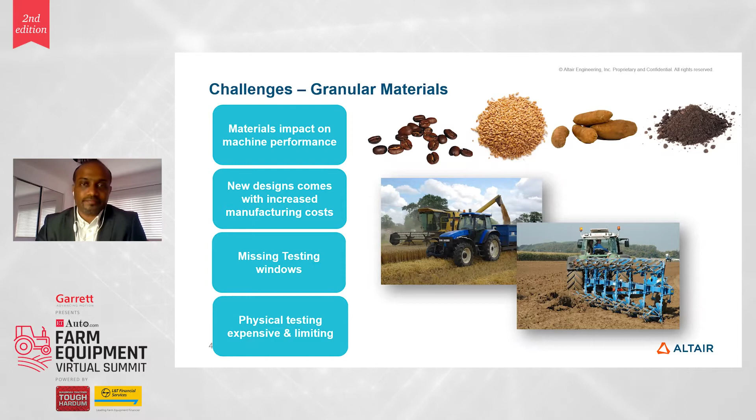This is where Altair EDEM comes into play. EDEM is a high-performance software for granular material simulation. It is powered by the state-of-the-art technology called the discrete element method, also known as DEM. EDEM simulates and analyzes the behavior of granular materials such as crops, seeds, soil, grains, and powders, and provides crucial insight into how these materials interact with the geometry or equipment in a range of operating conditions.

At Altair, we understand that CAE tools used in isolation only give you part of the picture. Driven by this, we have developed a range of multi-physics solutions inside the Altair suite, allowing designers and analysts to take a holistic approach rather than a siloed approach when designing such complex machinery.

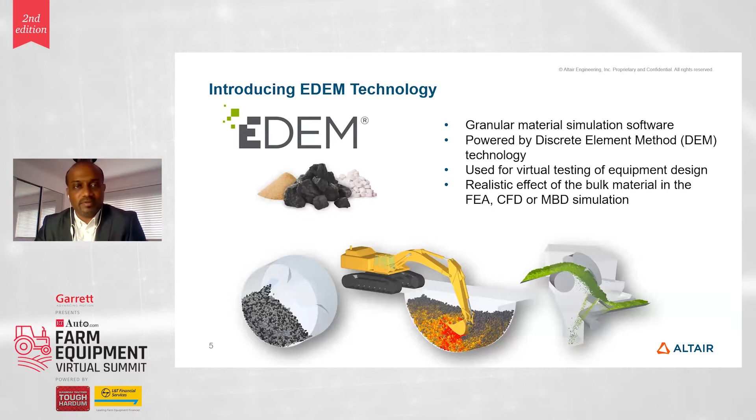Let's look at some of the benefits. EDEM can be used early in the design process to drive design decisions that can have a positive impact on the overall performance and reliability of agricultural machinery.

It helps avoid missing planting and testing cycles, saving time and money. It provides engineers with crucial insights into how materials like crops, seeds, and soil interact with the geometry or equipment during a range of operations and process conditions.

It enables engineers to investigate new designs without increasing manufacturing costs. Because you can run a large number of virtual simulations, you're able to test these designs virtually before producing physical prototypes for field tests.

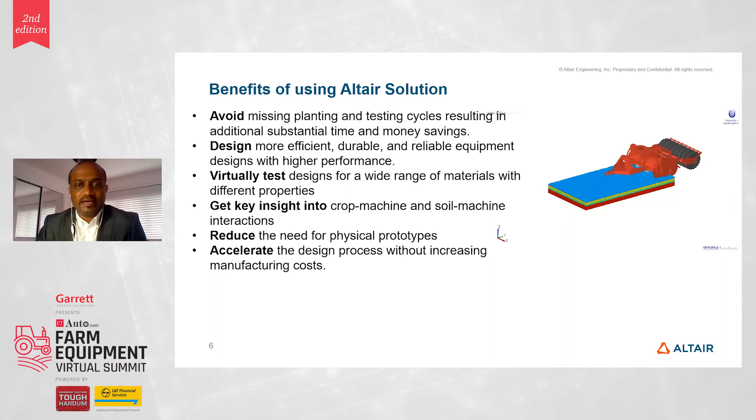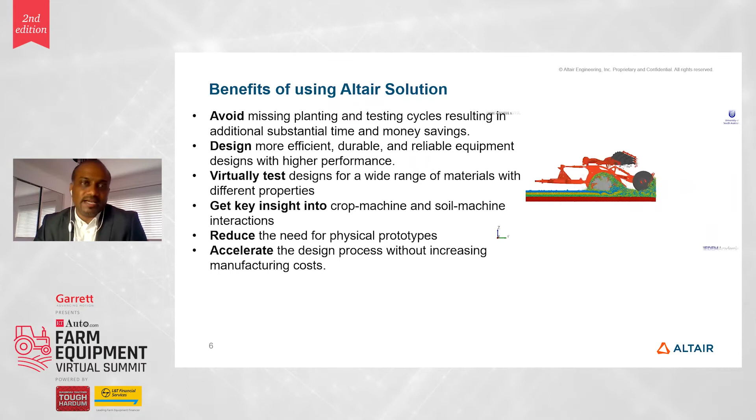Another big benefit of these simulations is repeatability. When working in a virtual environment, the material models you use are predefined, giving you a very repeatable test environment to compare results between design iterations—something which cannot be guaranteed with physical testing.

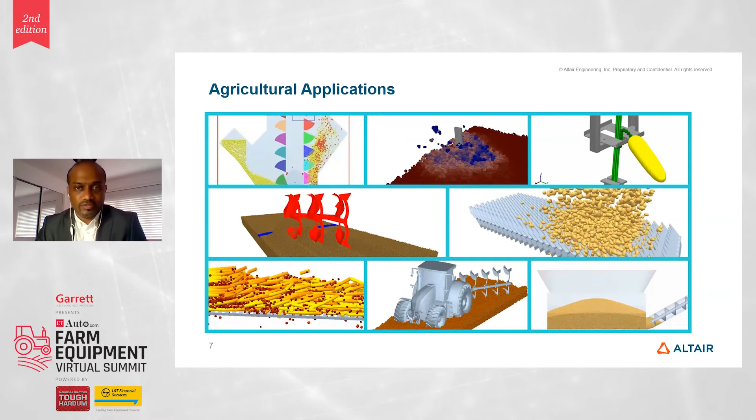The industry is highly competitive, and manufacturers are driven to bring innovations to market before each harvest season. The use of Altair EDEM technology has allowed companies in this sector to come up with innovations and reduce reliance on prototyping. These are some of the applications listed here, and we will cover a few of those today and how farm machinery companies are utilizing them.

First, let's look at grain and crop handling systems, specifically focusing on combine harvesters. The Indian combine harvester market is projected to grow at about 5% during the next few years. Combine harvesters in India are majorly used for harvesting grains and cereals compared to other crop types. According to recent research, the market is dominated by self-propelled combine harvesters, and more than 50% of harvesting of wheat and rice in India is already mechanized. This is where the industry is focusing on driving innovation and efficiency.

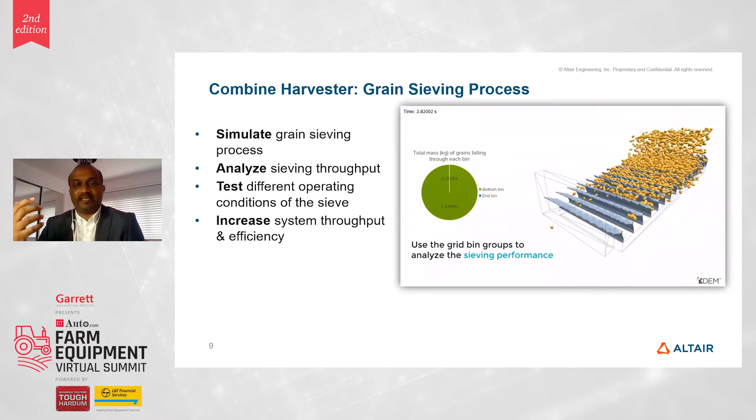Let's consider the typical process within a combine harvester where advanced technology like Altair EDEM can be utilized. One process inside the combine harvester is sieving, which separates the grain from unwanted plant material. EDEM technology can be used to assess sieving throughput and compare different sieve designs across a range of operating conditions. For example, you can look at different sieve designs and modify the frequency at which the sieve is vibrated to find the best design and operating conditions for maximum throughput.

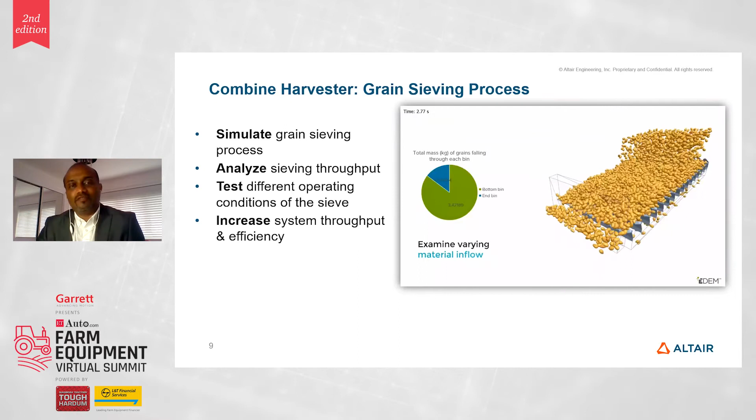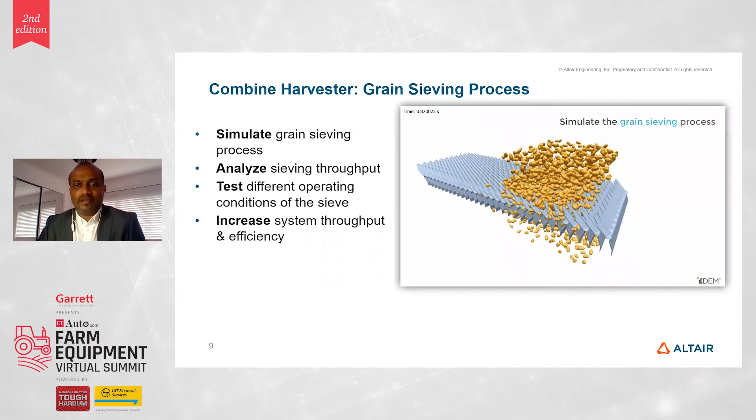This kind of virtual prototyping allows you not only to innovate, but also to avoid missing testing cycles due to adverse weather conditions like monsoons, resulting in substantial time and money savings.

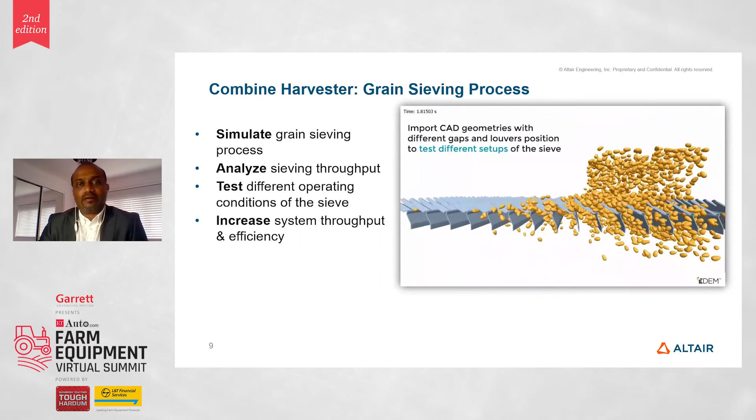Another application within a combine harvester is the straw chopping process. The cutting of threshed straw and its uniform distribution is very important. Any stalk cutting operation requires energy, and the shorter the straw is chopped, the more cuts are needed and more power is required. EDEM can be used to compare different designs and predict how they influence stalk orientation and improve chopping quality, which also improves power consumption. All of this has a direct impact on the ultimate performance of the machinery.

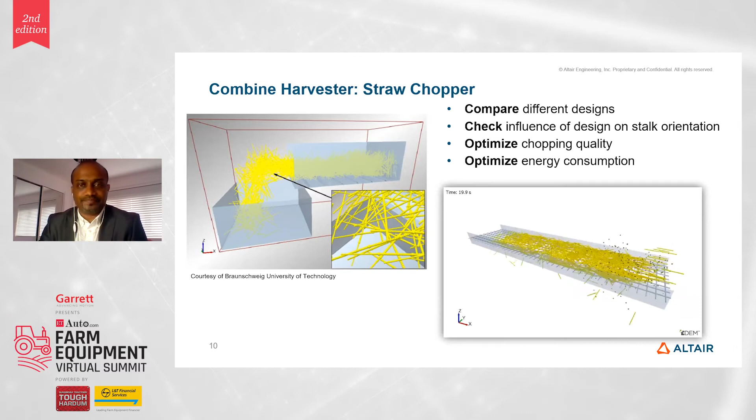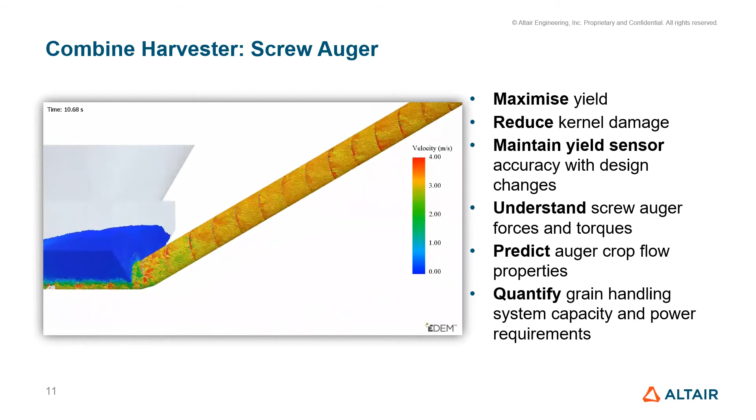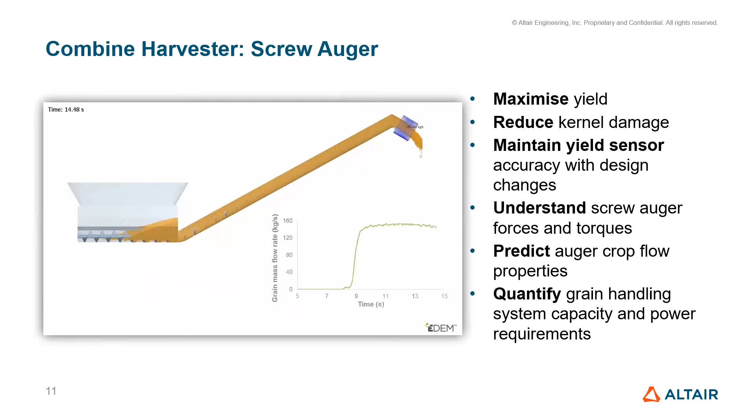Another process that can be studied with EDEM is screw augers. In combine harvesters, they are used to transport grains into a bin. In this particular case, the hopper is filled with material representing grain. Then the screw augers, one horizontal and one angled into the vertical direction, begin rotating, and you can see the grain begin to be transported. The grains are then displayed by velocity and mass flow rate - just some of the types of visualizations you can do using these simulation technologies.

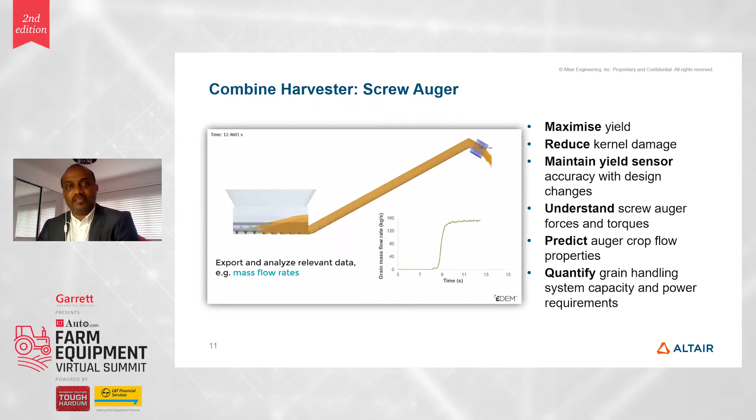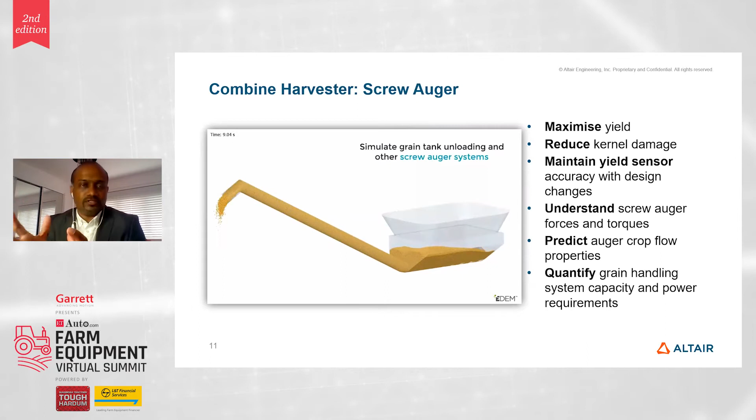We've had users who optimized the screw auger by changing the size and speed of rotation, resulting in 99% of the material going into the bin as required, whereas previously, with the old designs before simulation, almost 40% of the material went onto the field rather than onto the bin. It also helped them reduce loads by 50%, reduce wear, reduce damage to the geometry or equipment, reduce energy consumption, and reduce damage to the crop.

As I mentioned earlier, EDEM can be combined with other CAE tools such as FEA analysis, and we have some great Altair FEA tools within the portfolio. Within a combine harvester, a hopper full of grain-type material empties over time, and the contact forces from EDEM are mapped onto the FEA mesh. You can certainly notice the fidelity of the force input that the technology can provide. Alternative methods would require you to completely overlook the real loading scenario. These are the advantages that simulation technologies bring to designing some of this complex farm machinery.

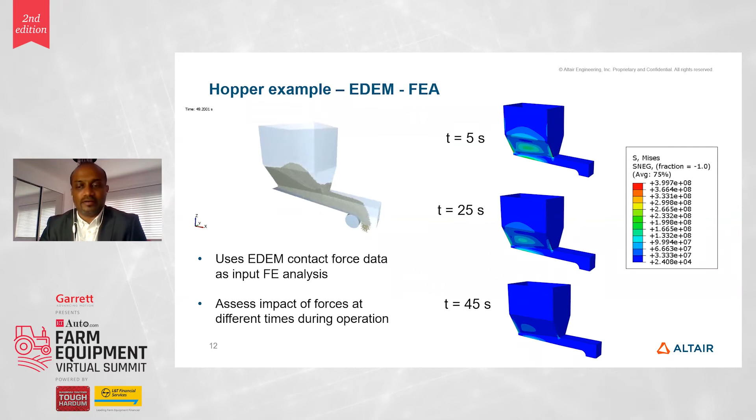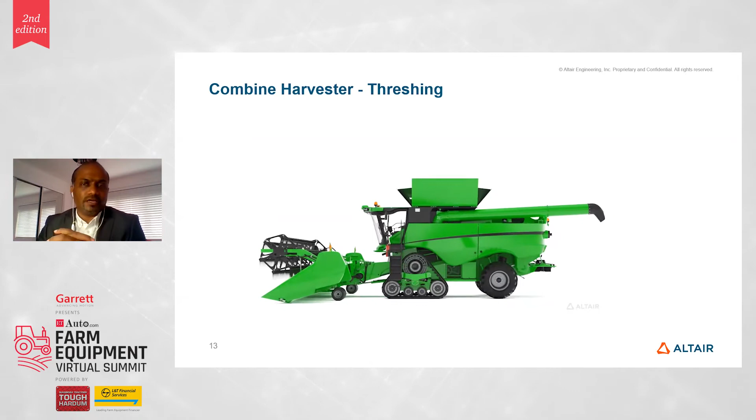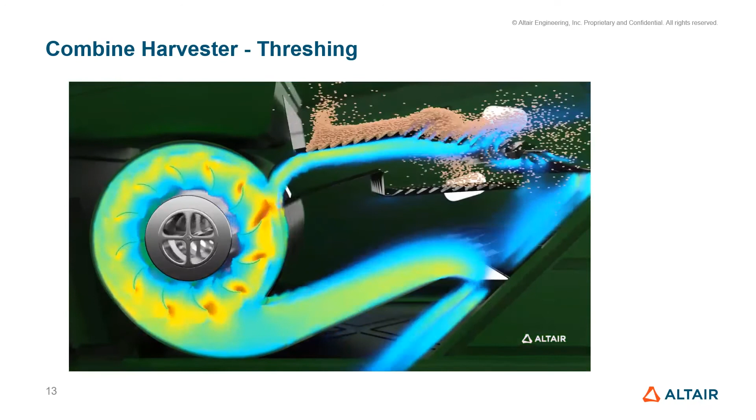So let us look at one of the most important processes: threshing. It is one of the most critical parts within the combine harvester, and often poorly understood due to its complexities. Altair has a great solution for modeling granular materials using Altair EDEM, as well as modeling the airflow using Altair CFD in a coupled environment, to solve this kind of complex problem.

So advanced analysis can be performed to make complex engineering decisions. Looking at the analysis, it can be predicted that by controlling the movement pattern and velocity of airflow, we can greatly influence the separation efficiency. These are the kind of in-depth analyses that we can get into earlier. Otherwise, it would have been a black box when designing some of these complex pieces of equipment.

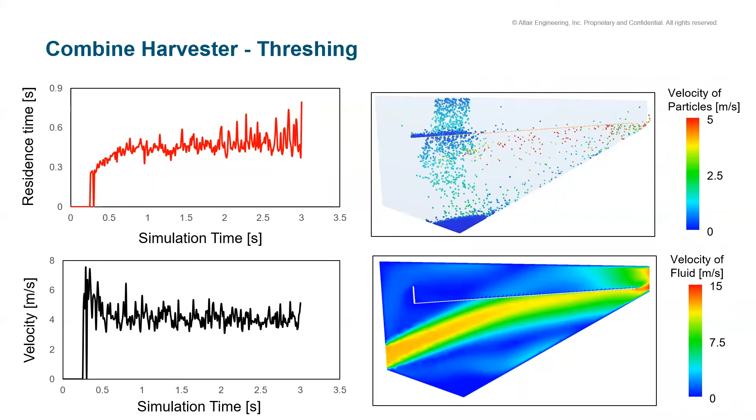Okay, so let's move on to the next example.

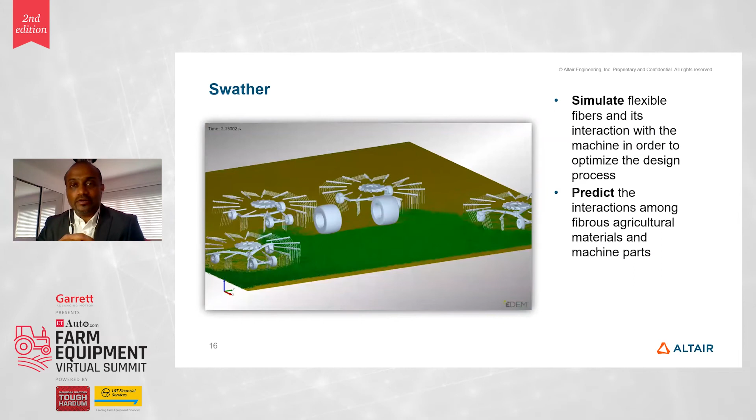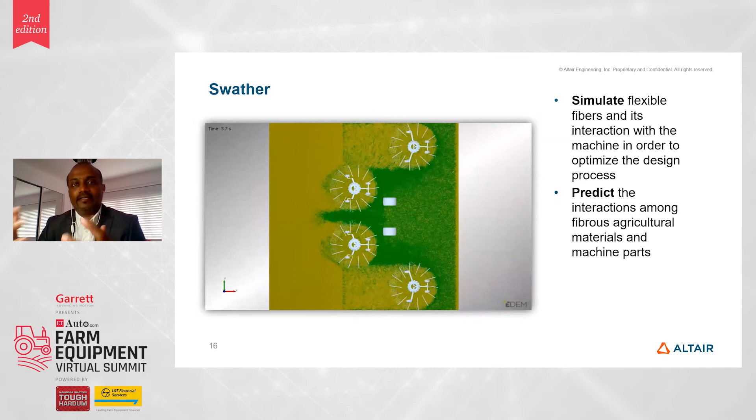This video shows an agricultural machine that moves grass into windrows. Complex materials like grass and other fibrous materials, and their interaction with the equipment, can be simulated using EDEM and other simulation technologies. What are you looking at?

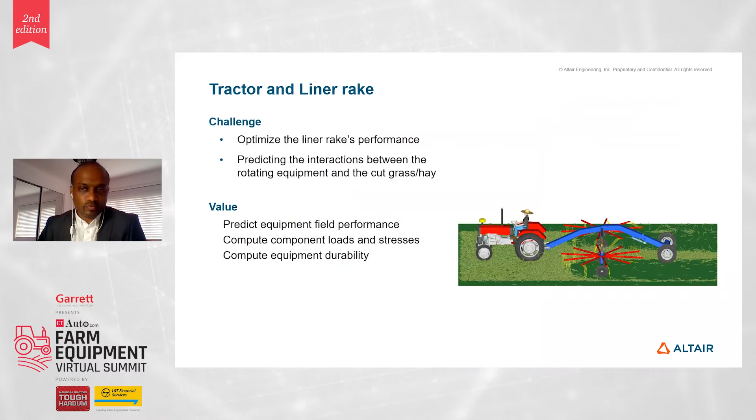As mentioned earlier, it is important to take a holistic approach when modeling such processes. So in this example, we are looking at ways to optimize the liner rake performance by simulating the full tractor and the motion of the equipment, and to understand the machine's dynamic response under different scenarios, for instance, the force required to move the system for different types of crops.

As you can see in this example, Altair offers a full portfolio, whereby EDEM provides realistic loads data and identifies areas where the equipment is likely to wear.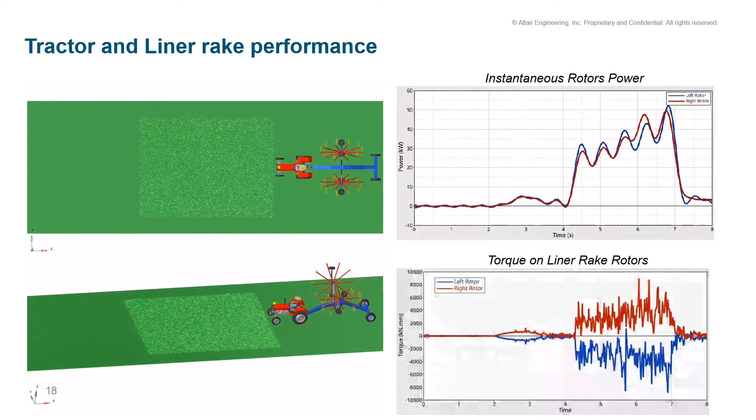By coupling EDEM technology with Altair Multibody Dynamics MotionSolve technology, it is possible to understand the global dynamics of the system. Here you can see a system model that can represent the real-world scenario by estimating the power consumption by the rotors.

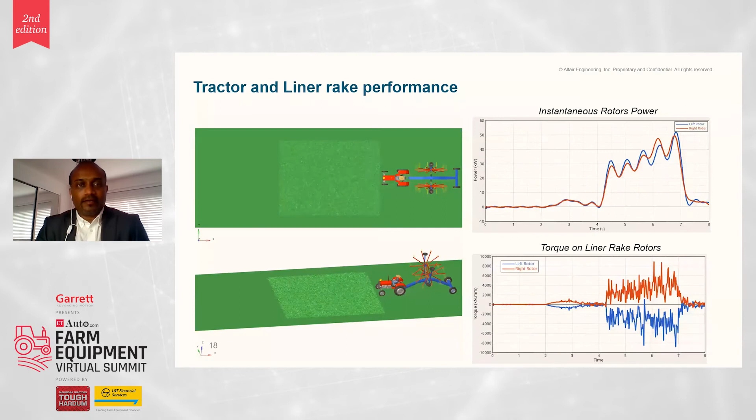Okay, so let's move on to the next section.

Here we are going to look at some examples of machine-soil interaction. In India, mechanization is concentrated on tillage and seedbed preparation and harvesting. In tillage, old types of equipment such as cultivators and disc plows are still used. According to a recent study, the use of proper equipment can increase crop productivity by up to 30% and reduce the cost by about 20%.

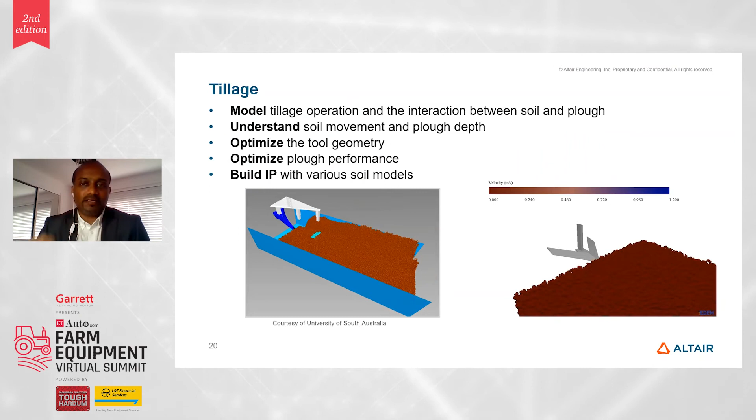These are substantial numbers we are talking about, and the question is how to achieve them. Improved efficiency and better productivity of tillage tools are extremely important to meet the growing demands of the industry. In the case of tillage equipment, the blades might be interacting with a range of soils across the country, with different levels of compressibility and stickiness, or perhaps even harder materials like rocks, all of which will impact the durability as well as the performance of the machine.

So being able to predict how the equipment will be affected by a specific material, and identifying potential wear on the tools, represents a key aspect to ensure the machines will perform as expected.

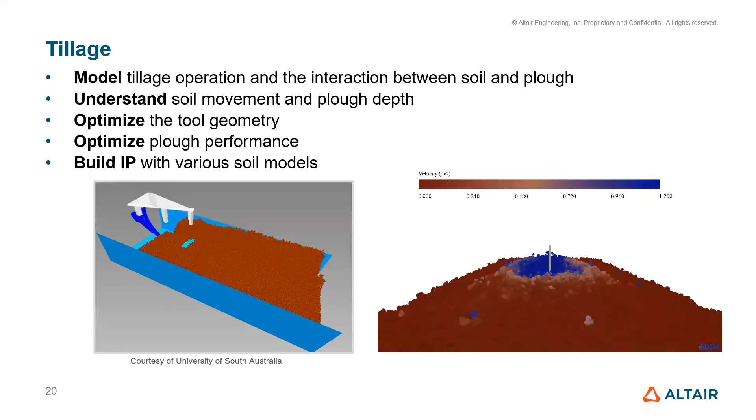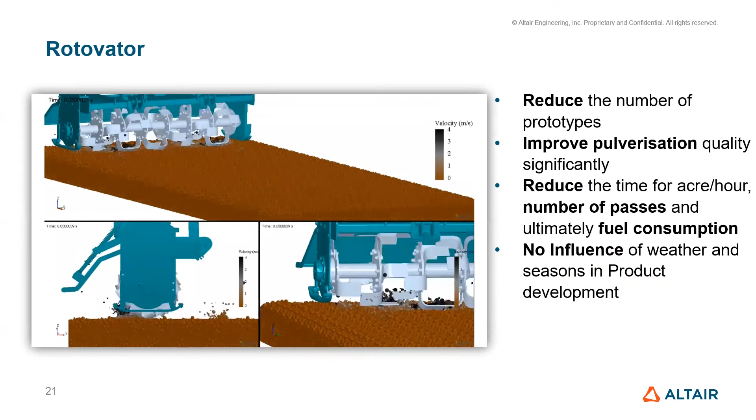In the next example, I'll show you the single shaft rotovator. A rotovator is an agricultural implement used to prepare the soil by turning it at depth. Several in-depth analyses are shown here: pulverization quality, voidage measurement before and after operation, draft force, vertical force, torque acting on the rotovator, through to the power required to operate at a desired depth of cut.

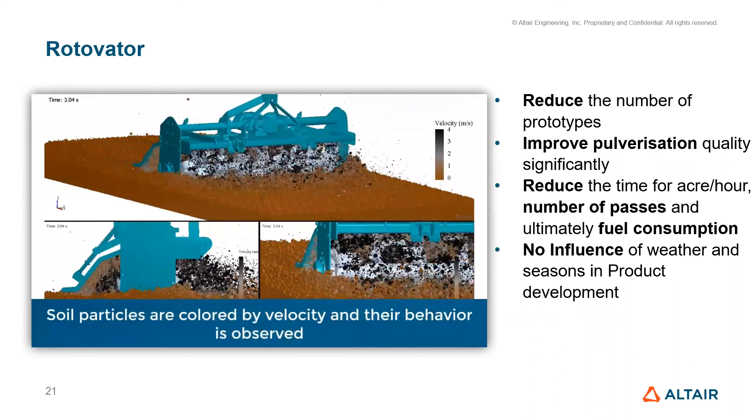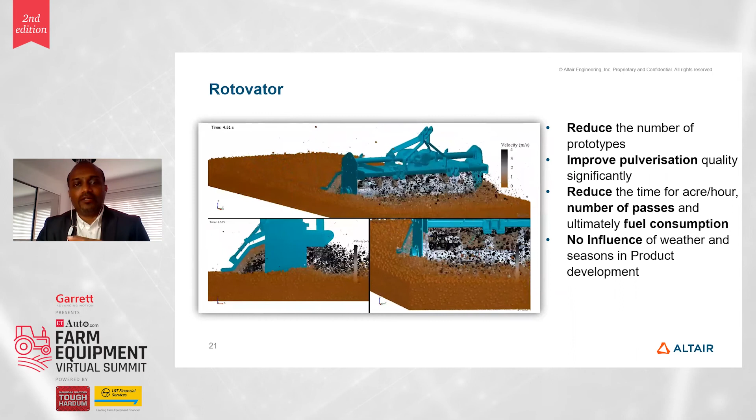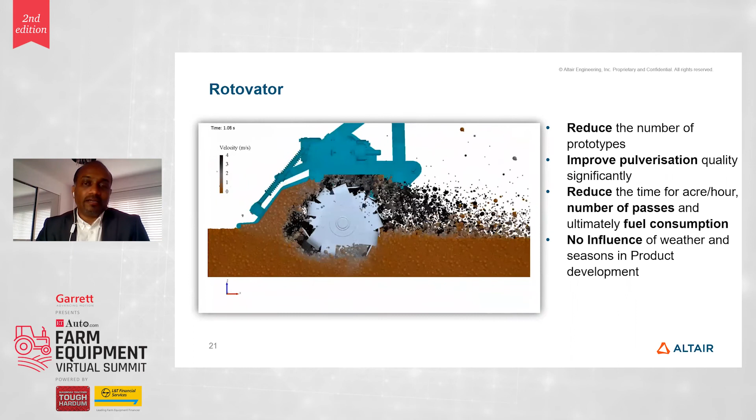Using these state-of-the-art simulation technologies, manufacturers can reduce the number of prototypes as well as come up with a solution during the right season. Trying out different blade profiles and different operations takes too much time if they go to field testing for every single configuration.

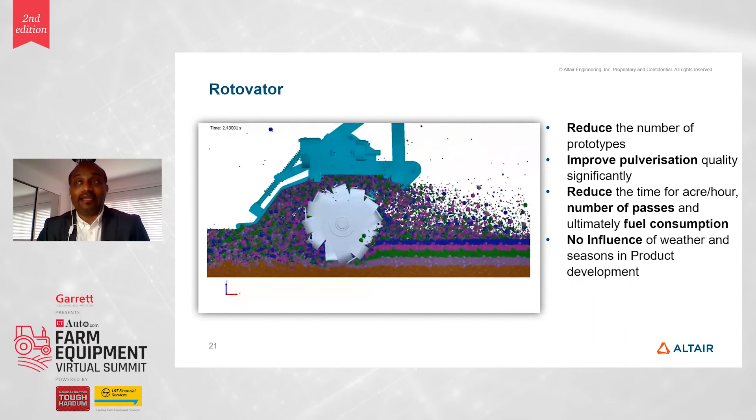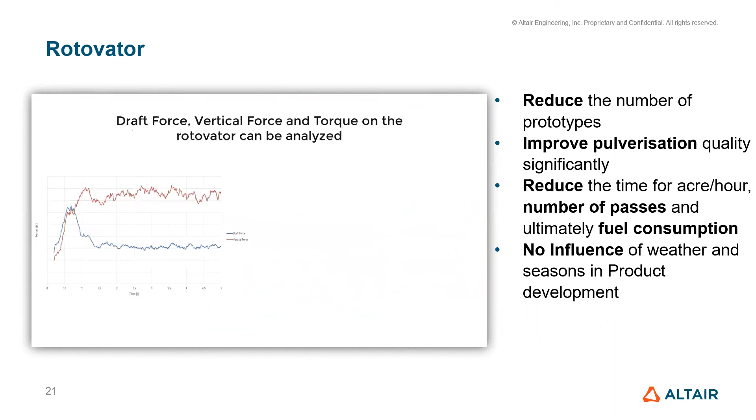So reducing two passes of soil tillage to one pass, and identifying the different depth of cut and soil pulverization for different types of blade geometry, all have a direct impact on the time taken per acre per hour, and ultimately on fuel consumption.

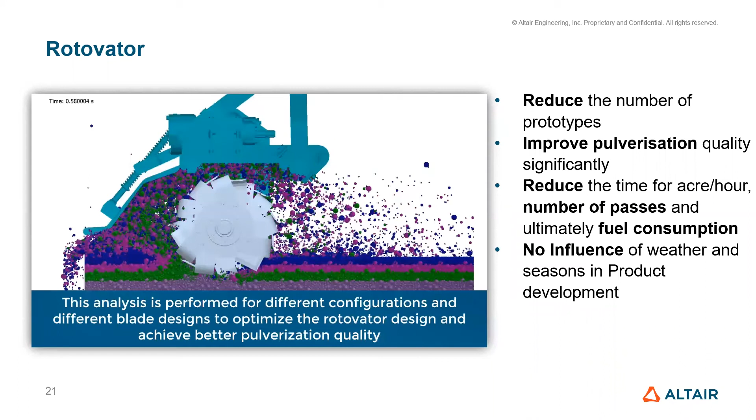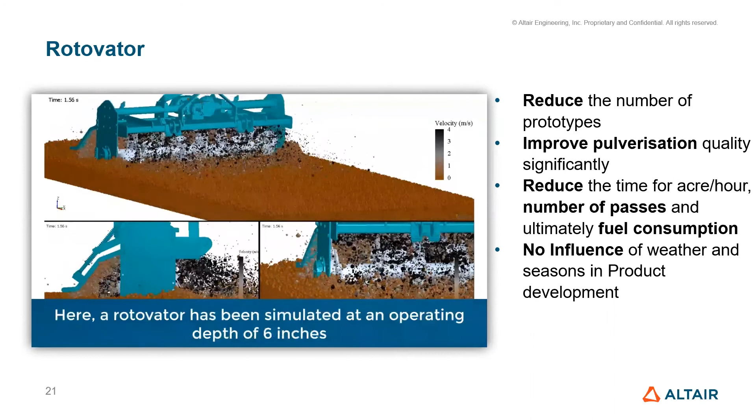Using simulation, there is no influence on weather and seasons in product development. You can do A/B product comparison with the same boundary condition, but with less cost and faster build of prototype. Better visual understanding of the black box inside the machines are some of the key business benefits for farm machinery manufacturers.

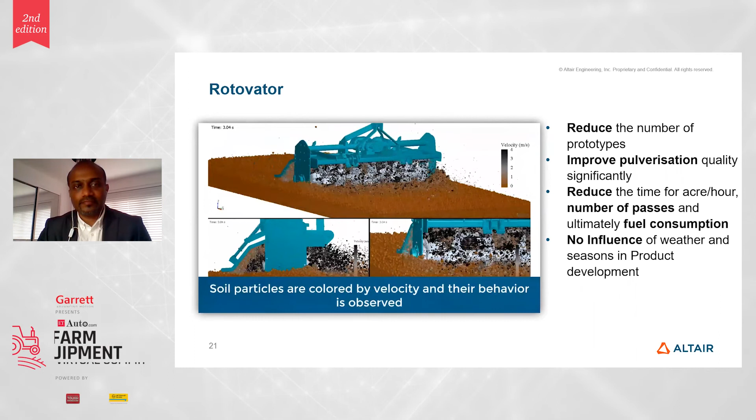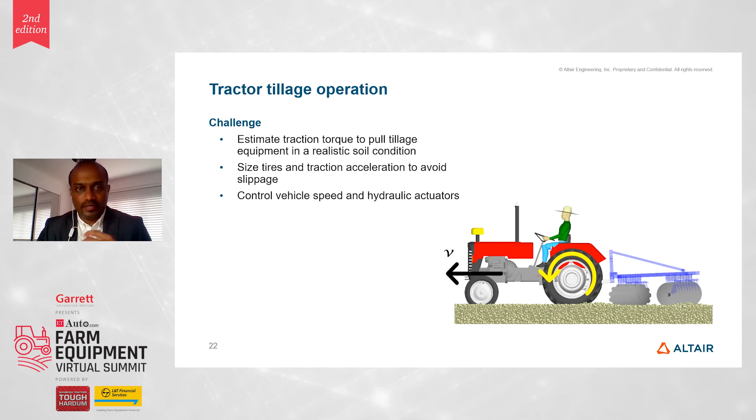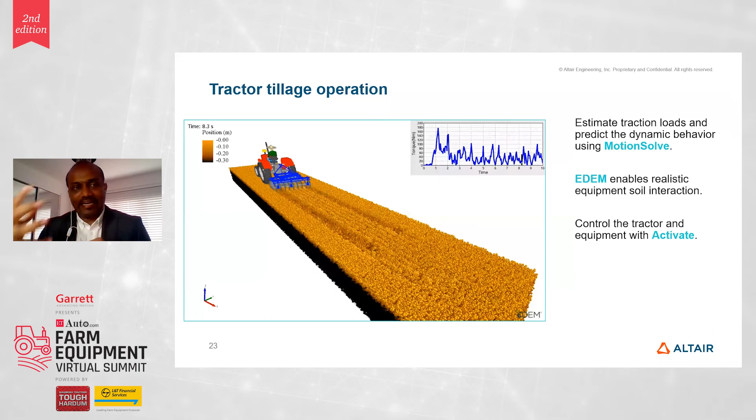Here is an example of using the full Altair solution for a tractor tillage operation. Users can estimate the torque required to pull the tillage equipment under different soil conditions. We are taking advantage of three different Altair tools: EDEM for granular material, in this case soil; MotionSolve for multibody dynamics, looking at the vehicle dynamics of the tractor system; and Activate for modeling the actuators and control systems.

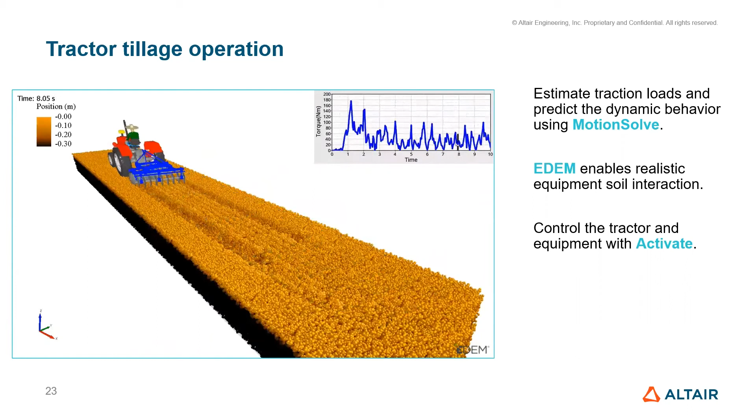EDEM can provide different soil conditions and realistic loads data, so now you're able to take a holistic approach in modeling such full system solutions.

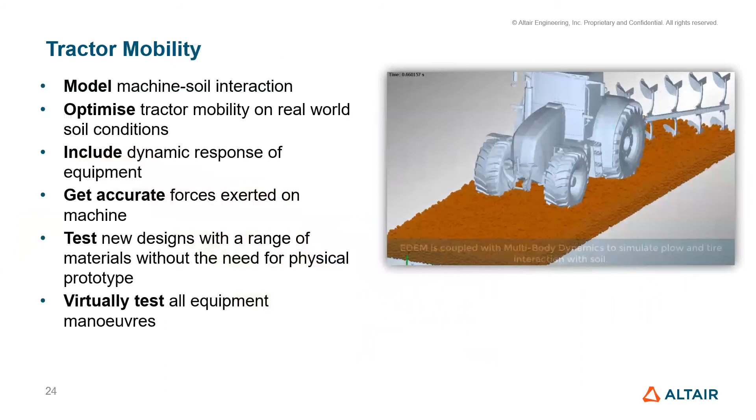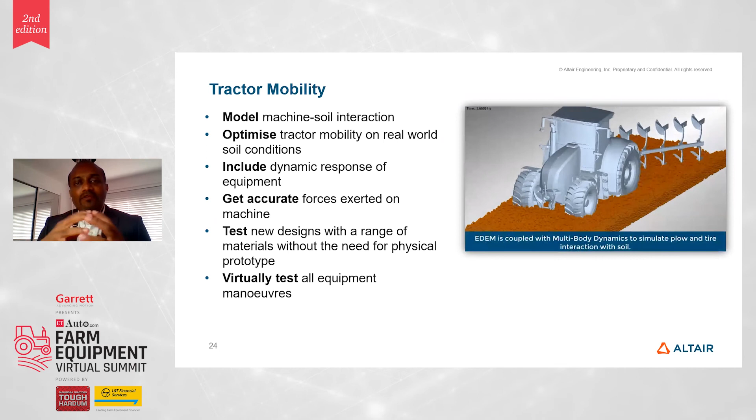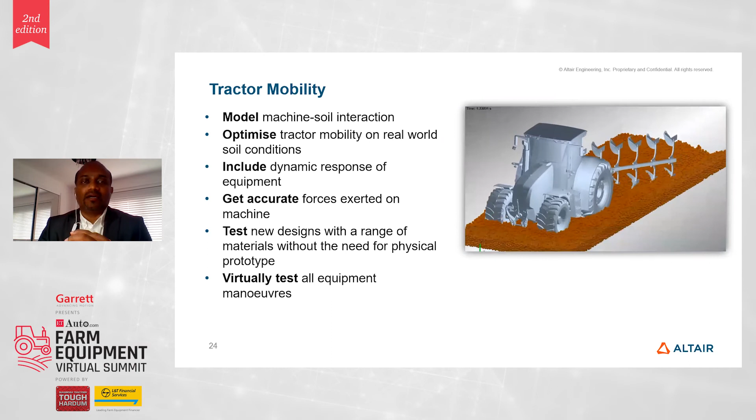Another sector where Altair solutions can be deployed is to understand tractor mobility, looking at tire-soil interaction. Being able to predict dynamic behavior of vehicles when interacting with soil is crucial for understanding how these machines will perform in a range of operating conditions.

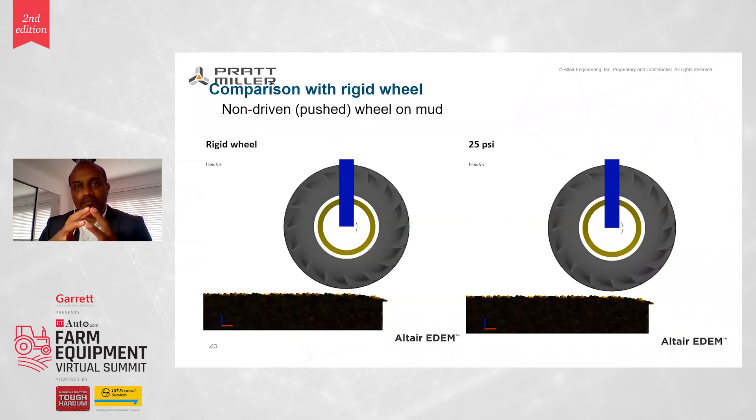This is where Altair has a groundbreaking technology, developed by our partners Pratt and Miller Engineering, to model flexible tires. Flexible tires are important, especially within the agricultural tractor segment, focusing on tractor tires interacting with mud and soft soil. It is very important for off-road vehicles, especially for development of ABS, TCS, and central tire inflation systems.

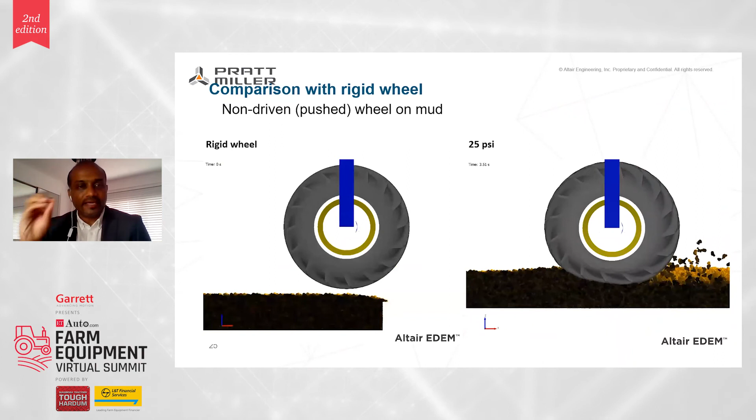Let's look at a comparison between a rigid tire and a flex tire under the same soil terrain condition. On the left, the high pressure tractor tire has a deep bulldozing effect with bigger penetration on the rigid wheel. On the right, the low pressure tire floats over the soil with half the penetration. This is very important - there is not only a significant difference in resistance, but also a clear indicator from an energy and fuel consumption standpoint, which helps in understanding how to improve these designs.

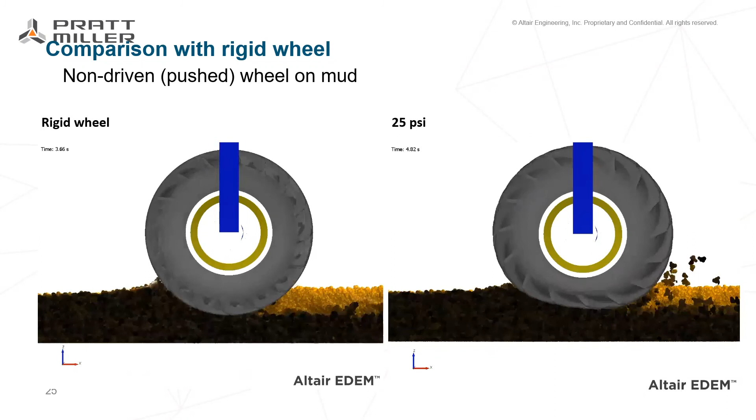When used in conjunction with Altair's MBD solution, Multibody Dynamics code, it allows tractor OEMs to study full vehicle behavior, mobility resistance, traction controls, power required, and TCS and ABS development. It can also be used to study pressure distribution, grip, tread pattern, soil pressure, soil damage, and seed damage. It's very important to make sure tire deformability is taken into account in the development of tractors.

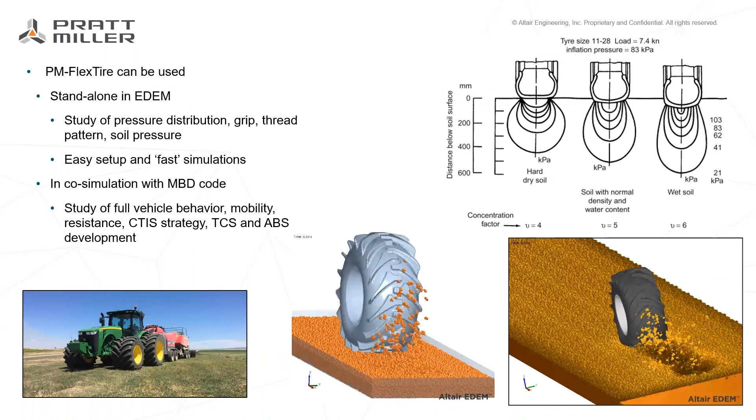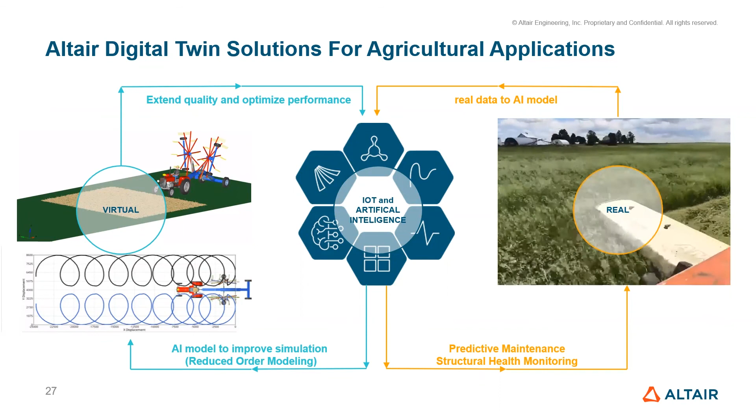Finally, companies are moving towards digital twin solutions, and Altair's know-how is helping companies around the world support this digital transformation. New digital solutions must allow you to strengthen the link between simulation and physical model in order to take advantage of both worlds in favor of the product you design.

These state-of-the-art simulation technologies can be powered, nurtured, and enriched with real-world data. We have solutions to organize, prepare, clean, and make them talk, to get the best out of them, and build smart models that will ultimately improve the performance of your product.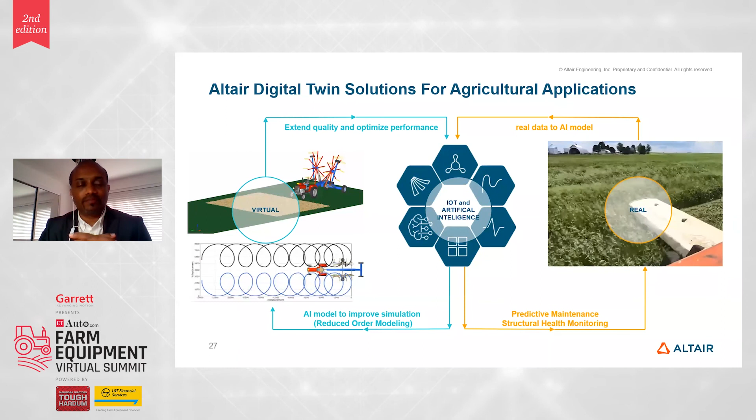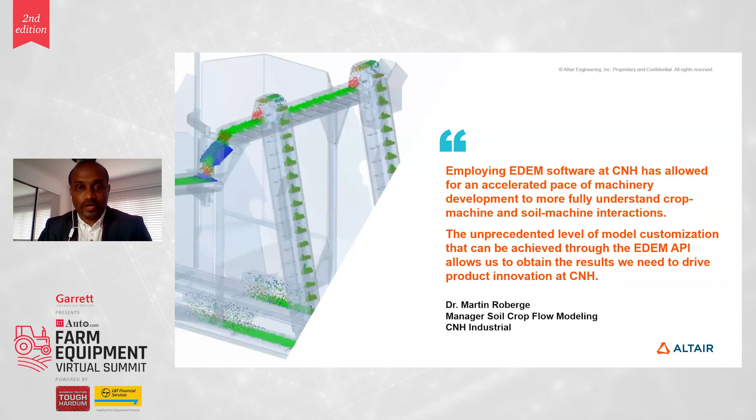With this, I would like to end my talk, and I hope my presentation was helpful in understanding how farm machinery companies can utilize some of the latest simulation technologies to innovate and reduce the time to market for new products. Okay, thank you very much. Stay safe.